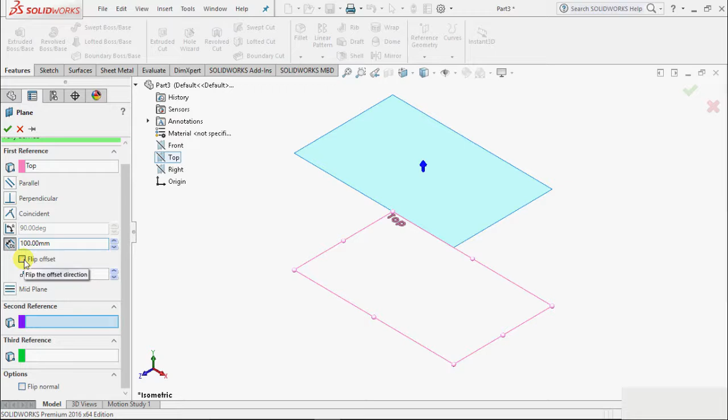So suppose I give this offset distance as 100 millimeters, and we can see the datum plane. This in blue color is the plane we are creating. Then we can flip the direction by clicking flip, and it will create this plane in the other direction. We can uncheck this.

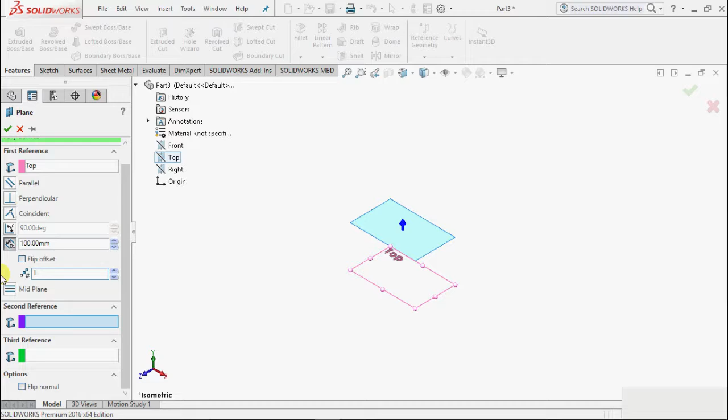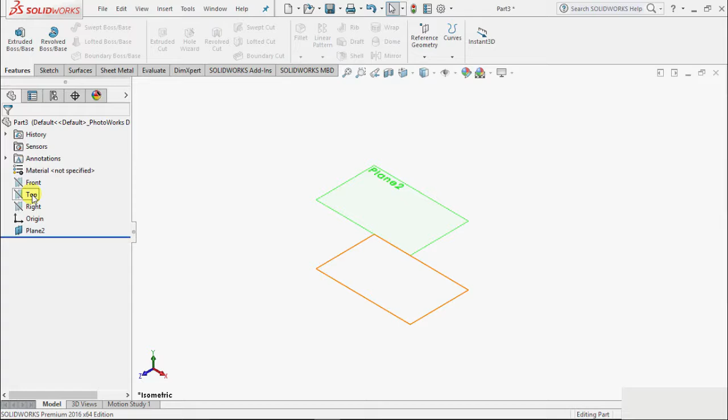Now we see the plane we created is showing as plane 2, and it is at an offset from this top plane. So we take the cursor to the top plane and we can see the preview of this plane. That is the first basic way of creating datum planes.

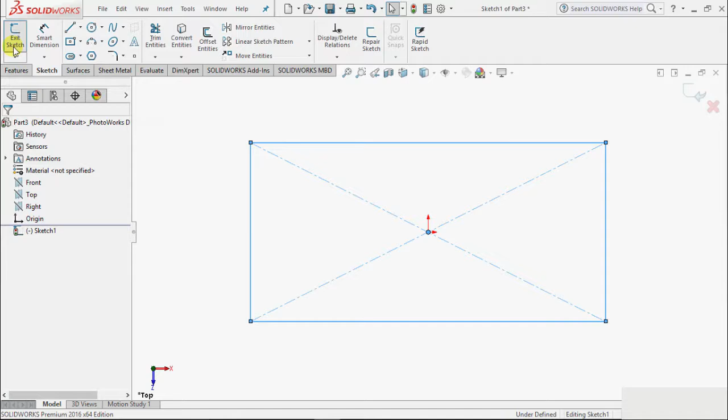Another way of creating planes is by using object references. So I select this plane, right click and delete. This time I want to create a plane with respect to some object. So select this extrude, select a top plane and draw a center rectangle, then exit sketch, give it some height, and click OK.

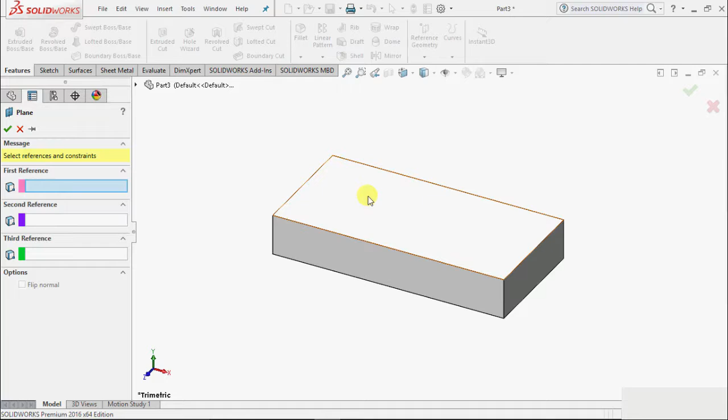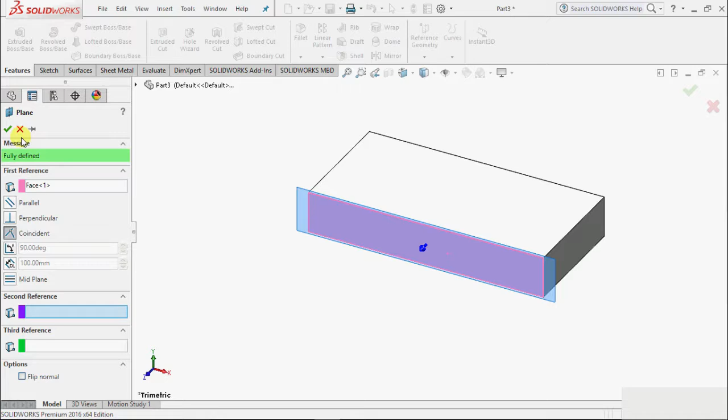Now let's see what type of planes we can draw for reference. Select this plane. Now we can give the reference a face also. Suppose I select this face, so currently it is at some distance of 100. What if I want to make it coincident? Select coincident. Then it will not be at a distance, it will be coincident to the surface, and we can see it highlights the message that it is fully defined. Click OK, and we have defined a plane. There are more ways to define a plane.

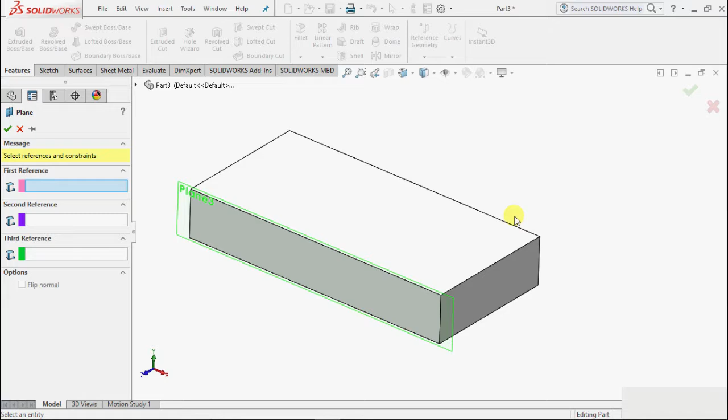Suppose I once again go to this plane. This time I give more than one reference. Let me select this first reference, the edge. Then the second reference I give is the face, the top face. So what is the advantage of this?

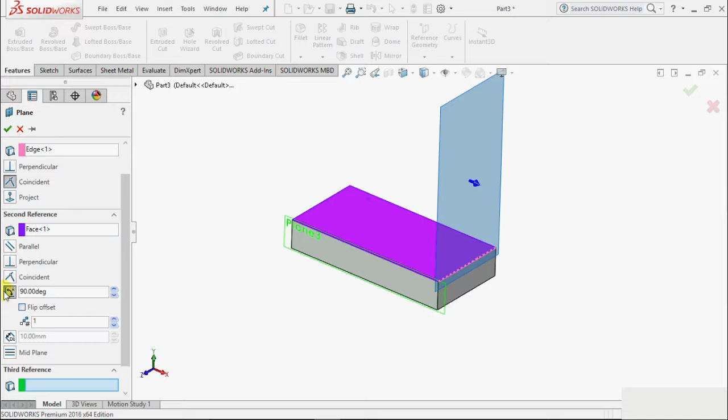Now the advantage is that we can assign a plane at some angle. Currently it is at 90 degrees, so we have to change this angle. Click on angle, suppose I make this 45 degrees and press enter, and we can see with respect to this horizontal plane, this is now at 45 degrees. This arrow shows it going in the outward direction, we can flip the direction to be inward, or flip this again and click OK.

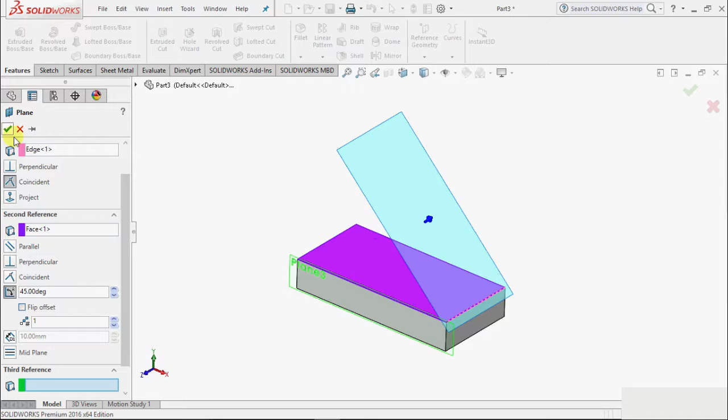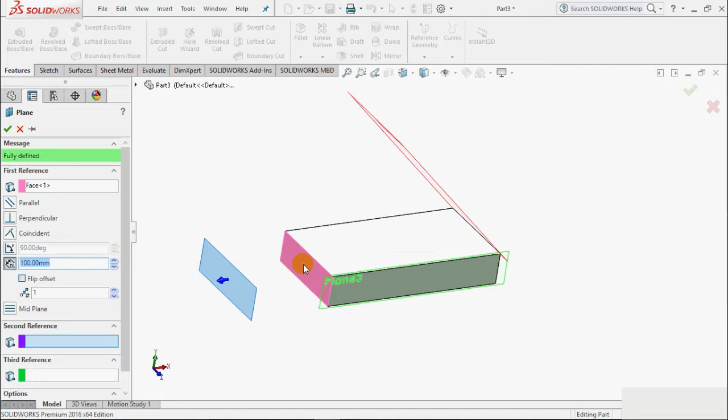So we have assigned these two planes, and we can also make planes perpendicular. Go to plane once again. So where we want to make a perpendicular plane, suppose on this top face, on the side face, select plane as perpendicular, and we can see the possible perpendicular plane to this, and click OK.

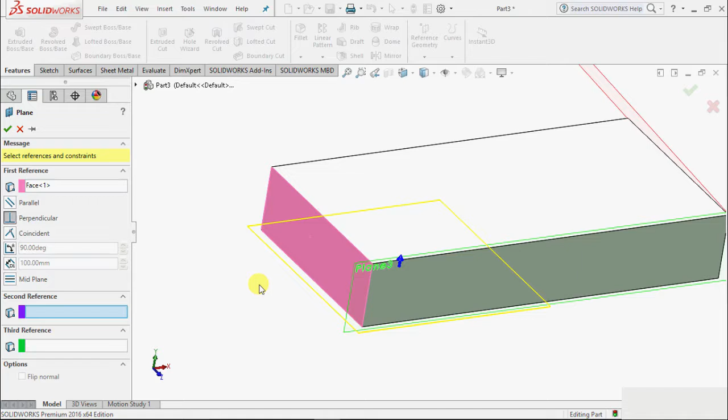Okay, this is not fully defined, so we need more references. I give it a second reference, suppose this reference. Once again click on this, right click, delete. So here we need to give some more reference for this. Suppose I give this edge as a reference and let's see what happens. We have to give this edge because we selected this face. Suppose I give this edge as the second reference, and now we can see this is fully defined, and click OK.

And this way we can insert the datum planes. Now we can create the sketch on these planes.